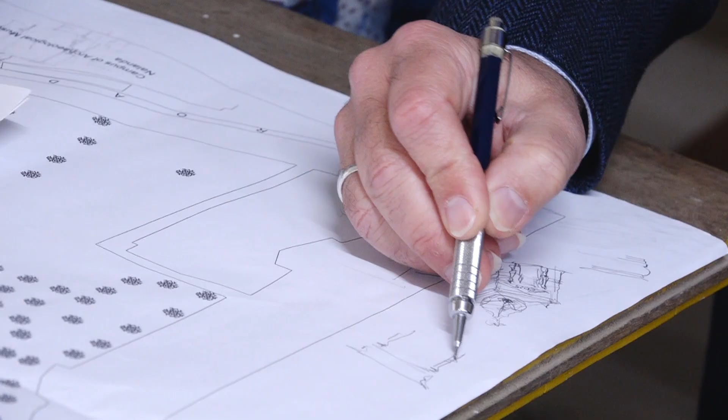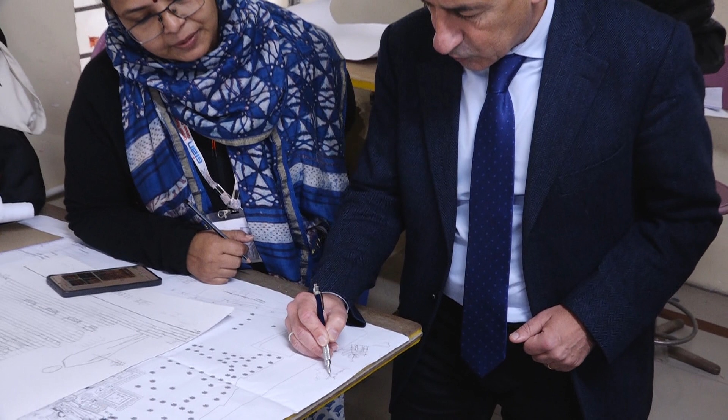Something that is making a renovation, taking inspiration from the stupa. Yeah, you can. Yeah, it is possible actually.

This is the gate to the side of the museum. The main gate to the archaeological.

Yeah, remember that if you need to increase a little bit, it's not a problem. If you feel that it looks squat, you want to make it... No, that's why I say that. In case you want to write it at actually 6 meters, and you feel that it's necessary to have 7, 8 meters, don't be afraid to change something.

What is this for, which meeting? For the museum entrance gate. The museum entrance. Okay.

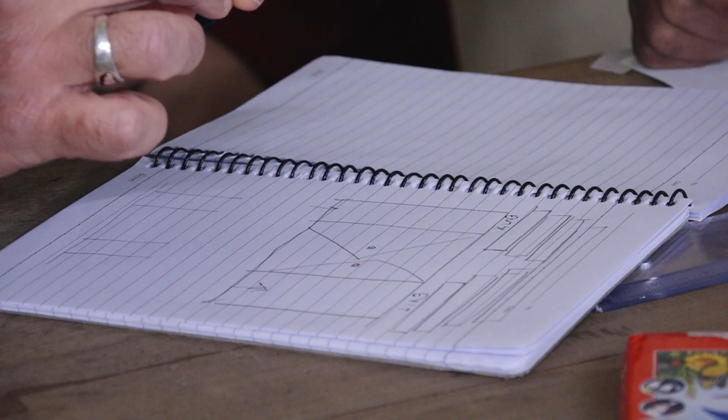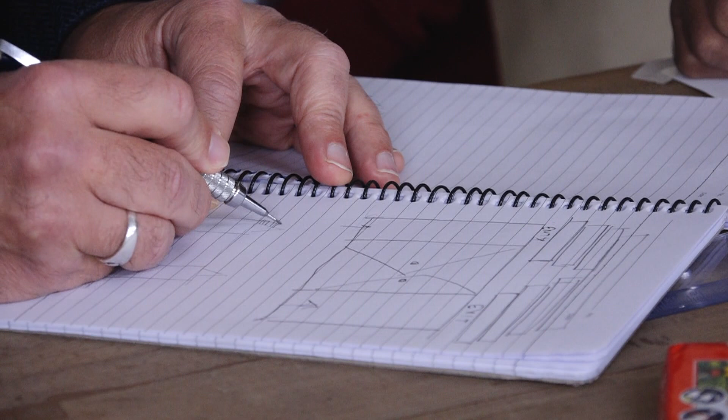So I'm wondering if, for instance, you can imagine having a triangle here that is much more manageable with the bricks, like this, for the passages for people.

And then here you can work on these - I don't know what kind of shape or art you want to do - to make something that at the end doesn't become immense or very weak, because you have to consider that these bricks can only project this much, and every brick is this thickness. So to close a passage like this would be immense.

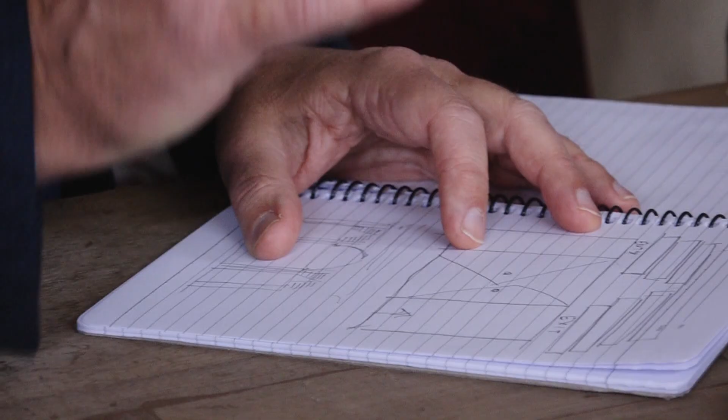So at that point, I think this would be much more manageable. Then here you can do whatever you think you want to do, because this could also be something that considers the system of these big slabs of wood sitting on these.

So in section you can have this facade projecting out like one of the monasteries. So here, then over this wood, you can have some...

The name of the museum - I decided to write the name of the museum in a frieze. At that point you can also write 'museum' or whatever you want, so you can create a kind of frieze here.

Then you have the fluting, and then here you will see this could even be flat with this system, because this is a nice system used to enter into monasteries. We have this stone bracket - if this is even lower, you can have more of this stone bracket. You have this tiny projection that makes everything feasible and justifies this good idea of having the triangular opening.

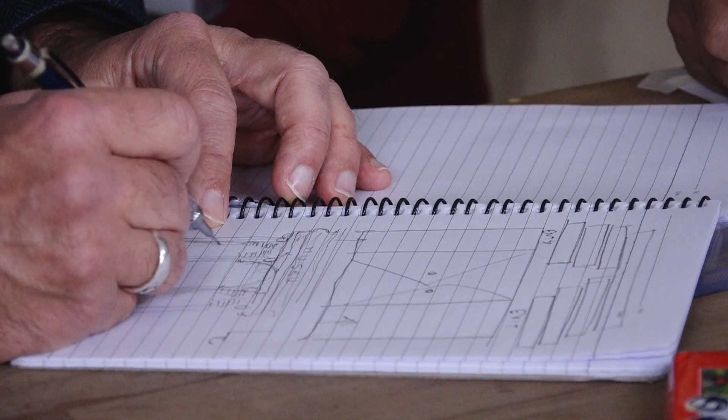Then in between, if you want to make something more complex, you can make some of the colonnettes that you are doing.

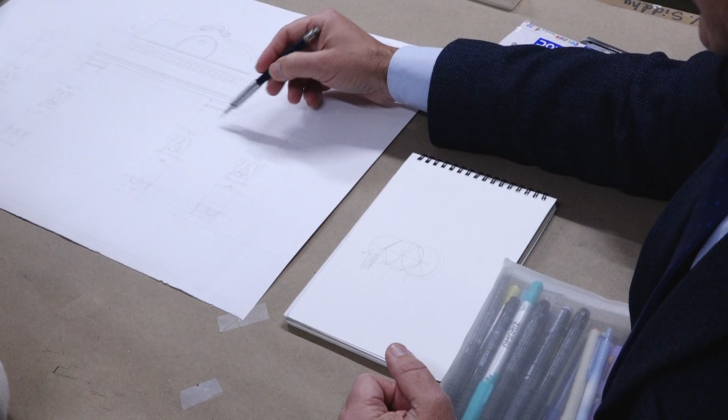If this line goes down to match this circle, you have the perfect abutment that prevents the collapse of the pier. So you will realize that if this is an arch, it's going to fall down because this is too thin. But considering that this is part of what is supporting, giving a little bit of thickness and a strong connection between this and that, this force is going to be contrasted. Clear?

The thicker it is... okay.

Standing here, there is some fascia supporting the window. Having a column, for instance with brick - if this is the window, and you have this plate here, the window looks a little bit suspended. But if you have a row of bricks below, running differently in the most stable pattern, this becomes a good bed for the opening. Then above you can have the cornice for the radiation.

At that point you organize the facade, which for sure is going to have a tripartition. You have the possibility to insert typical cornices made with a simple projection and rotation of bricks.

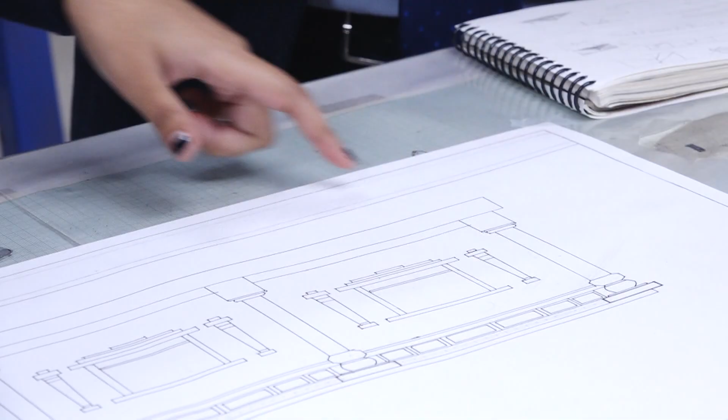For ornamentation, we also have the columns - these are actually fixed columns. We want a half column projected from there, and there was a niche when we ended one of the other sides. We've taken that structure into account, speaking the same language as this building. So for the window, instead of making the cornice I was mentioning, you can think about the fact that in the same building you can have the same base and crenellation for your windows without adding anything, because it's the same building.

So wrapping around, instead of having several kinds of windows, we can always have the same features, which also makes the work easier, because once they know how to do one, they can do all the others without getting crazy. They can hire more people to work all on the same drawing.

Further, some of the buildings have this kind of pedestal that we step up on. So we are incorporating that here, with 150mm there, and we will include ornamentation. We want to include that arch-related ornamentation, like how it was in the pillars and the temple - we had a lot of arches going on. So we'll be doing that, and since the structure is so heavily ornamented, we are going to keep the pillars simple but ornament their bases, the pedestals.

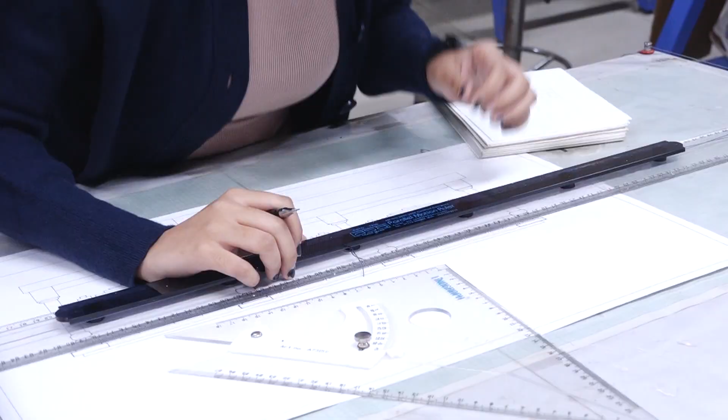There was also an idol picture. It was not an idol, but it was depicting like it was an idol.

Like this one, so it resembles an idol. We'll be mimicking that, but it will help us show if it is a male or female toilet. No, because we can't make an idol, it's not a religious place. So we are deciding to make something simple, more understandable for people, to explain if it is a female washroom or a male washroom. So this idol concept we are using.

So this idol concept we are using to denote the male and female. But now you are already working with a big pattern, which obviously needs to be modified when you make all these things.

It would be easier to work with a flat surface, research all these elements we want to introduce, and then freehand paint the brick shape, because these are following the indentation of the brick. These are bricks that are partially indented and partially not. It's been reassessed and all these issues, if necessary, I would rather avoid.

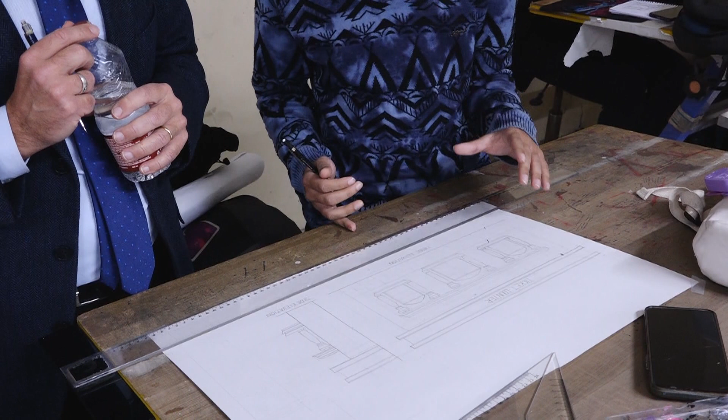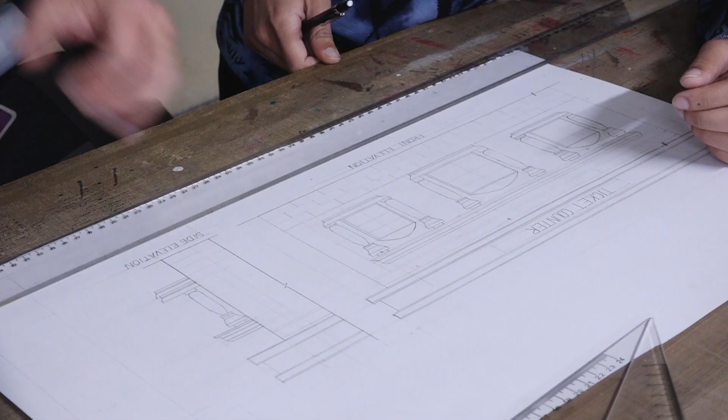Yeah, I took that as reference because we didn't measure it. That's why. But you should see the file that was produced, it was to be shared, not made by those who took it. Because as I remember, the brick was thin, roughly 6 or 7, and it was 22 to 25 in width.

Which means that keeping the line you have, probably changing the vertical line, you can bring this to the shape of a real brick and not a block of stone, because this looks like ashlar construction. But the rest, I think it's nice, maybe you have to work a little bit on the wall.

The only very important suggestion I can give you is don't write freehand what you want to write. It's not a crime to write with a computer and trace with a good font to be realistic. And being in this building for Nalanda, having only English, I think it's not proper. I would write ticket office, ticket counter, whatever, both in Hindi and in English, with a beautiful font.

So part of the decoration, many buildings are decorated thanks to beautiful inscription, because it's an art. The art of calligraphy was the Greek name for beautiful writing, that's calligraphy. So it could be the gesture that gives the extra value to the building.

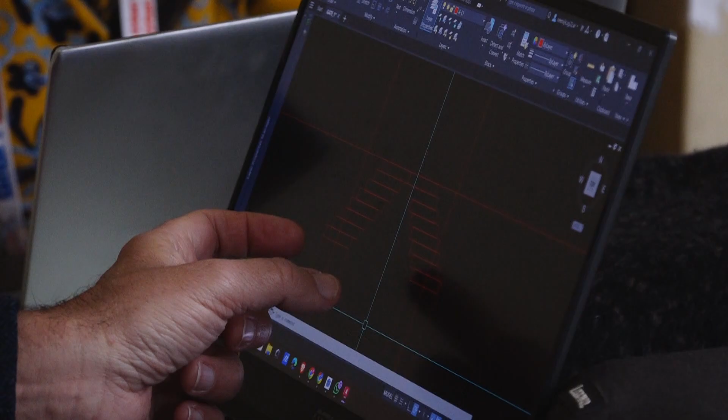Okay, thank you, go ahead. Thank you, much more stretched. You can simply use the projection to make it go taller. If the bricks have the thickness you have, and if you want to be more vertical, instead of having this projection which is like the thickness of the brick, you can have a projection that is like half, and the arch will arrive here more vertical. You understand?

No, because obviously, yeah, no, I got the layout, I got the layout. I was just wondering, well, if it is something that is not only celebrating culture.

My culture, I understand the similarity, because yesterday, two days ago, I was saying now I understood why the Spanish made this mistake and were talking about South America and India, because they found the incredible similarity, especially in the religious buildings. What I'm thinking, there was a manuscript, an Indian manuscript, Sanskrit, based on that.